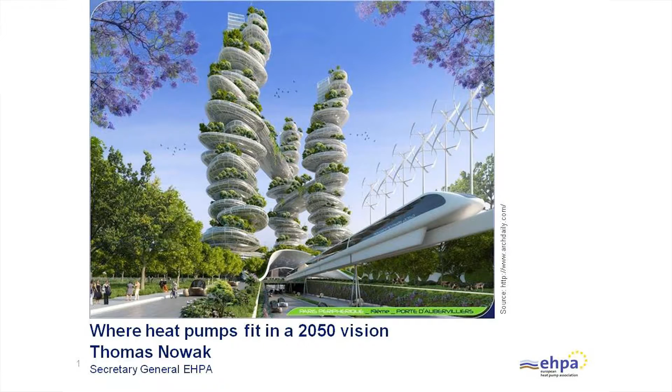I have to disappoint Paul because I will not talk about modeling heat pumps into a 2050 vision. That's Chris's presentation. And maybe also I have to disappoint you further because I'm a big fan of the European Commission voting for and deciding for renewables being used by heat pumps, which is actually, as a general statement, not the European Commission that did that, but all the member states agreed. So somebody in the UK said yes to that. And I think it was a very smart decision in the first place.

But how I wanted to start this: when I was about 14 years old, we had an insurance company that started with pictures like this. They made visions of the future, and these visions always looked very great. You had self-driving cars, you could just play chess or sleep while driving. Everything was renewable based, and so heating and cooling was no issue.

And after Paris and after the COP21, I think it is becoming an issue because we discuss renewable energy also in Brussels, and I'm a lobbyist. That's my main task, talk to the policymakers on what needs to be done. We talk about renewables and we talk about electricity. And this is one of the many graphs. If you want to dig into it, it's really probably a lifetime endeavor. How the energy system could develop in the future with relation to the CO2 emissions that come out of it.

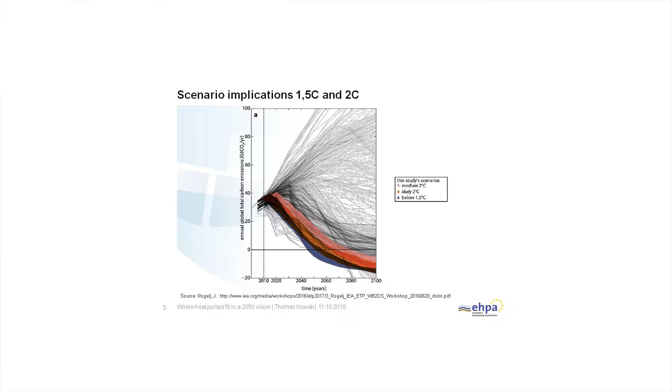And this is all the possible ways that have been calculated by UNFCCC, by Joeri Rogelj and others. And they have tried to come up with some likely pathways until 2050. And these likely pathways show us that there is actually a need to go beyond zero emissions. And that's something I am missing a little bit. You hear a lot that people say, yes, okay, now we have to do something, but it also has to be cost efficient. What you don't hear is what's the alternative costs if we don't do this.

And right now there's Hurricane Matthew going over Florida. Maybe it's not subject to global warming, but maybe it is. And then the cost is quite tremendous. I've also heard that in Denmark, they do all the construction to take care of overflooding in the city. I don't know what would happen to London if the sea level rises, but you can understand the issue. So there is a great understanding now from the policymakers to say, yes, we need to decarbonize the energy system.

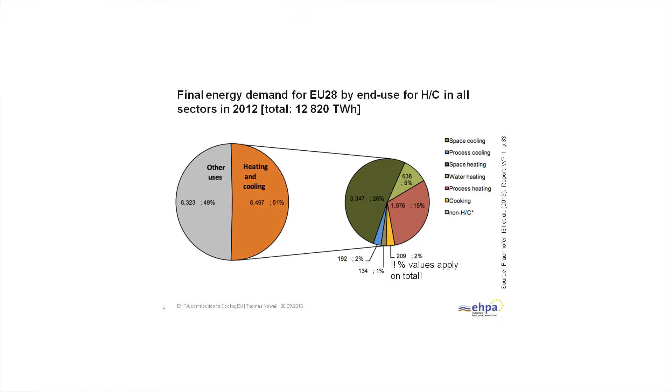And this is the energy system of Europe. So this is what we see in 2012. That's the best data I could find for this. And it shows that heating and cooling actually has more than 50% of this energy system. And it also shows that residential space heating is another 50% of that. It also shows that industrial applications have another around 15% of the total. This is always on the total application.

And now we know that heat pumps, and I will not talk about that at all, heat pumps can provide heating and cooling in a very efficient manner. I think the current developments that we see in reality, and I will see more in Chillventa, where I'm going tomorrow morning, will prove that efficiencies are increasing and application areas are increasing. But this is what we need to decarbonize. So if we don't decarbonize the heating sector, we will not decarbonize the energy system. That I'm quite convinced of.

And maybe a major reminder, because that's what I hear when I talk to policymakers. They say, yeah, it's all well and good, but it cannot cost much, and we should still use gas and oil for the foreseeable future. But if you burn fossil fuels, you will emit CO2. So it's rubbish in, rubbish out, in principle. How efficient that is, that may depend, but of course in the end it has to be zero, as I showed in the second slide.

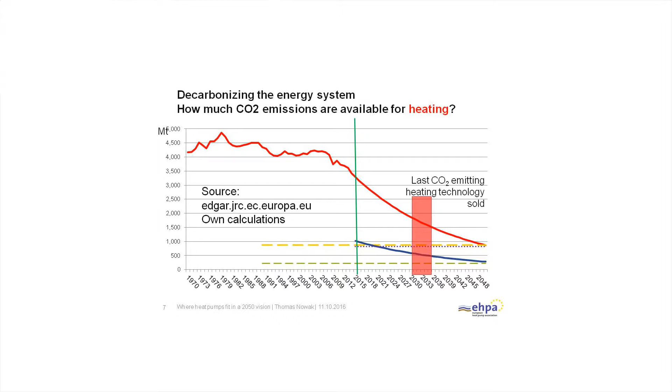But this is the residential heating sector, and if we don't decarbonize it until here, then it means that if it stays here, all the emissions that are still available in 2050 will be eaten by the heating sector. And I doubt that this is acceptable by other industries and by transport. So one conclusion that we can say: we have to decarbonize the heating sector. We have to do much more than just decarbonizing it by 15 to 20%, which is sometimes proposed these days by protagonists of the gas condensing boiler faction. Because this is what you get.

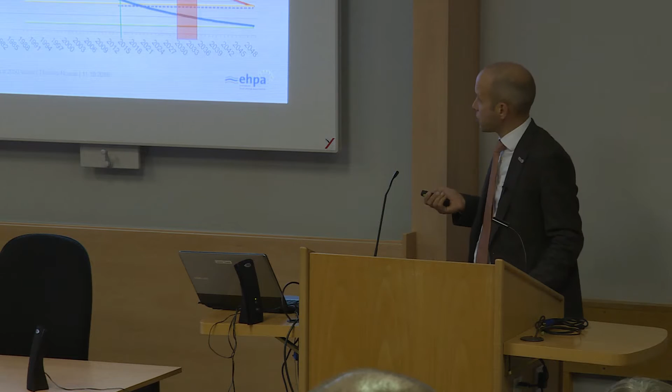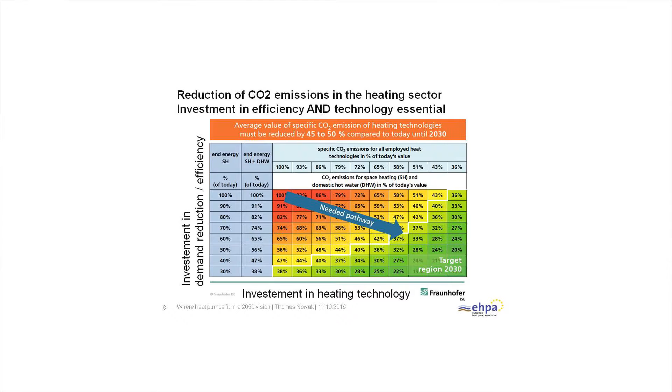If you go here to the dotted line, that's the 15 to 20% that you can get in improvements from replacing existing boilers with gas condensing boilers. There is a number of studies of people much smarter than me, and one of them is from the Fraunhofer Institute, and they have shown that until 2030 we have to invest both in heating technology and in insulation to achieve a meaningful decarbonization for the whole system, because we're always talking systems of somewhere around 45 to 50%. And obviously in 2050 then, because that's the long term, we have to go to zero.

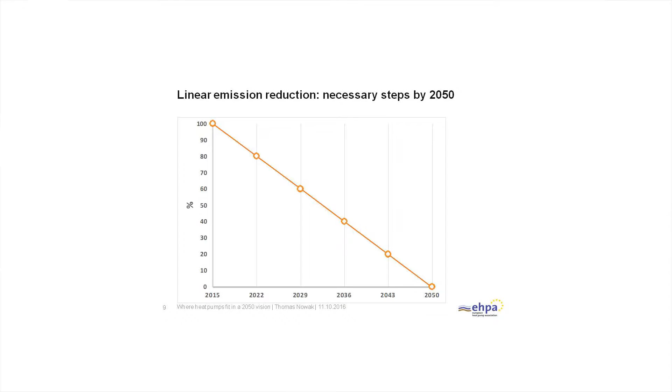This is again my simple mathematics. If we take linear emission reduction and we want to go to zero, then it's every 7 years another 20 percentage points. And if we then look at the opportunities that we have, so what could we do if we want to decarbonize? And that's then my answer to where do heat pumps fit into the 2050 energy system. Then we can take the 100% value from here. So this is my 100%. And we have this in mind. And then we say, okay, if this is 100% in 2015, after 7 years we have to be at 80%, after 7 years we have to be at 60%, after 7 years, you understand the story.

So it means also, what do we use still? We use a lot of coal, we still use direct electric in many countries, and of course the protagonists of that, they say no problem because we decarbonize the electricity system. Then there's people that say, yes, oil is the cheapest solution, so we cannot take it out because people have to be able to afford energy. But again, you see immediately that all these three don't work with what we need to do.

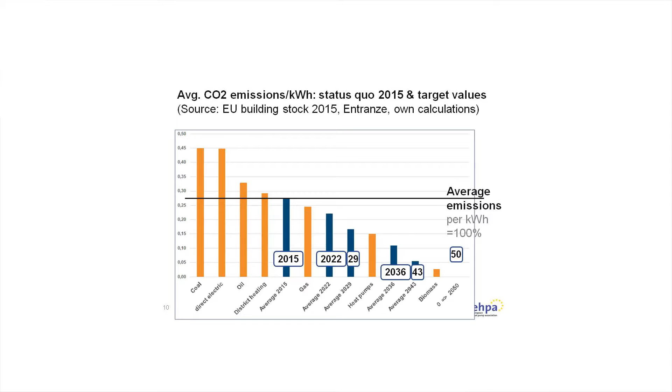District heating is a difficult one. I really could not get very good data on the emission factor of district heating. You ask 5 people, you get 7 results. I'm serious. If you look at how much positive support district heating gets, the lack of data is quite astonishing. And I say that because heat pumps have been punished for lack of data since I can think. So actually there has been a lot of development. I don't see the same in district heating. I'm not saying it's bad, because district heating in the end is, as many people pointed out, a distribution technology and not by itself good or bad. But we should have better data.

Then if we look at gas, yes, that's good. It's 242 grams of CO2 per kilowatt hour, and that probably is not going to change. Then we look at heat pumps, and again, you can make a lot of discussion. I just use a simple efficiency of roughly 3, and then you take the average emission factor for electricity, and then you end up around here. And there is a huge discussion in Europe on the primary energy factor. We can discuss that over lunch, but it would actually blow out the whole agenda here.

And then, of course, there's biomass, and biomass is, if you ask this or that person, a very good technology, or it's also polluting, and we have a lack of resources and so on and so forth. So I guess we can agree at least that we will not have enough biomass to fulfill 100% of the European energy demand. So it will be a mix of these that are below the grid. And then I can say heat pumps fit quite well, because at least at the current average efficiency of the electricity grid, we fulfill already a 60% requirement, which we have to achieve in 2029. Which also leaves us quite some time to develop the technology further, to improve efficiency, and to develop business models that allow for a proper integration of demand response, which heat pumps do very well.

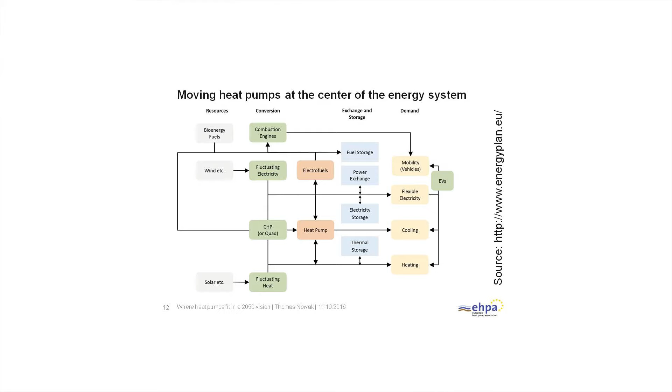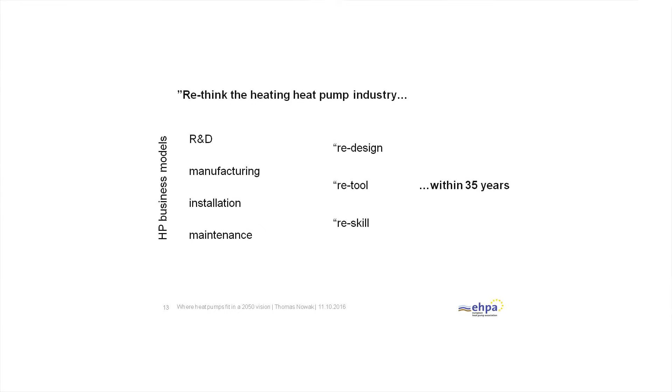How do we get there? And that's the other important thing. We need a transition period. We have to explain to people that this is a tremendous change. It applies to R&D, it applies to manufacturing, it applies to the installer, which is probably the biggest elephant in the room, and it applies to maintenance, but also to business models. And to use the same term, I think we need to redesign, we need to retool, and importantly, we need to reskill our value chain around heat pumps within the next 35 years. And if we manage to do that, then in my 2050 vision, heat pumps fit everywhere.